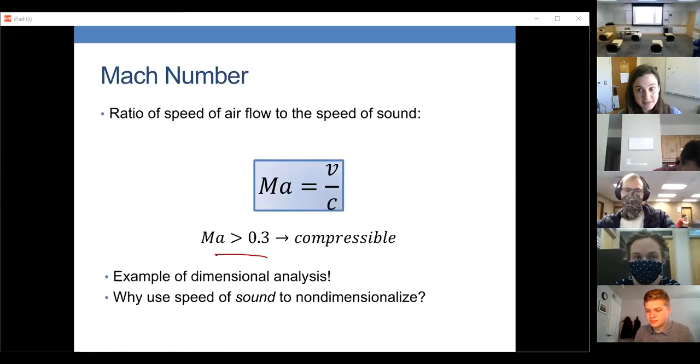What you're getting at is the fact that the speed of sound tells us how sonic waves propagate through the body, and that has to do with compressibility of the fluid. Okay, because the speed of sound is waves of fluctuating pressure and density. That's why you hear it, because that fluctuating pressure bangs on your eardrums.

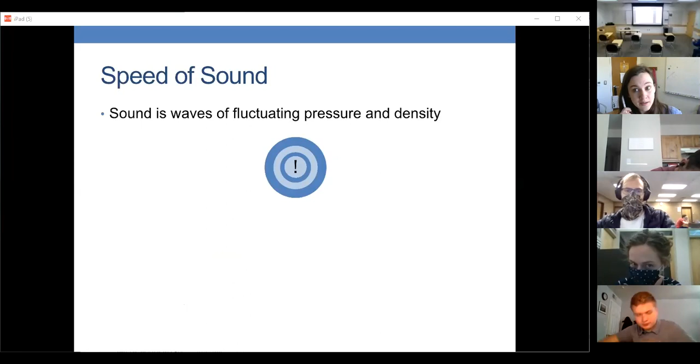And the speed of sound is defined like this. So how much of a change in pressure leads to one change in density and vice versa gives us the speed of sound, which means that the speed of sound is directly related to the compressibility of the gas, how easy the gas is to compress, or the liquid also. And it'll depend on things like the atoms and the interactions, all of that stuff.

Wait, what is the S subscript? Oh, that means constant entropy. Oh. Mm-hmm.

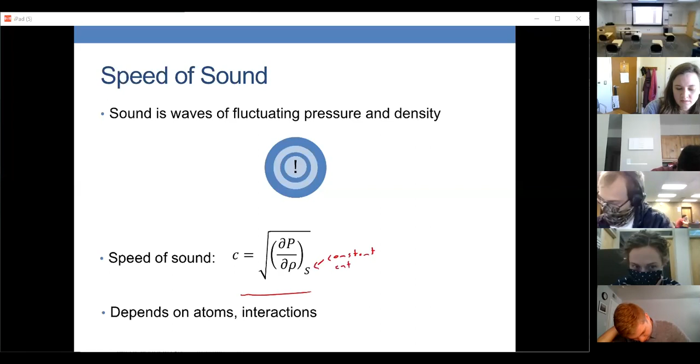But in general, let's say a fluid is easier to compress. That means that for a given change in pressure, you'll get a big change in density. So if a fluid is easier to compress, will it have a faster or a slower speed of sound? Based on that equation right there, I'm going to call on a random person. How about Carter Johnson? Hey, Carter.

Hello. Hi. So based on that equation, will an easier to compress fluid, that means the same delta P leads to a bigger change in the density, have a faster or slower speed of sound? Faster. Okay, look at this again. Wait, sorry, slower. Slower, yep, exactly. Why? Because essentially the density is on the bottom, right? So a smaller density means a bigger C value.

Yep. All right. So this tells us that if a fluid is easier to compress, it will have a slower speed of sound. If it's harder to compress, it will have a higher speed of sound. Basically, if it's harder to compress, the waves will propagate, whereas if it's easier to compress, you'll get some compression rather than those waves banging out against each other.

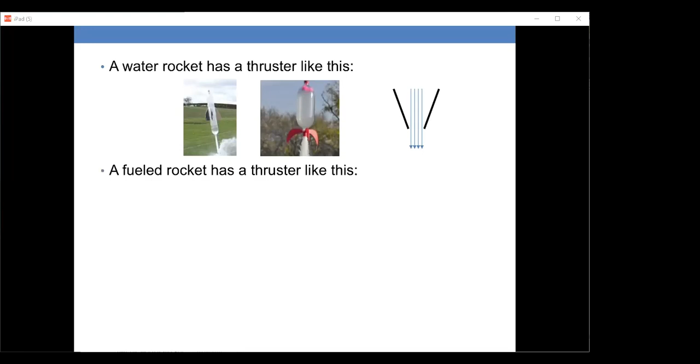You decrease that area, just like when you put your thumb on the hose and it gets faster, it increases the velocity of the water coming out, which, because of the change in momentum, makes the rocket fly up. Okay? But then a fueled rocket has a thruster like that. It gets wider. Why? Because it's not relying on delta P.

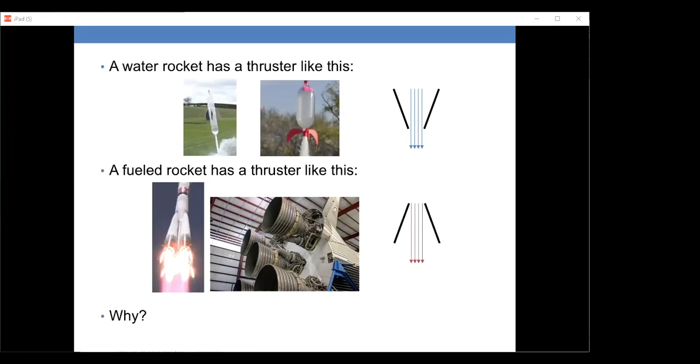We will see. We will see. This is a question I have asked you. I want you to be percolating it in your minds. Okay. So the conservation of mass is just, we know the mass flow rate is constant, which means density times the volumetric flow rate is constant, which means density times the velocity times the area is constant. And this is all for sort of 1D flows. So we're going through like this. Okay.

Right, so we could say, Professor? Yes. Is it because the two fluids coming out of the two rockets, one is compressible and one is not? That is why. Yep. It is because out of the fueled rocket, flow is compressible, and therefore the thruster has to look like that for reasons that we will see shortly.

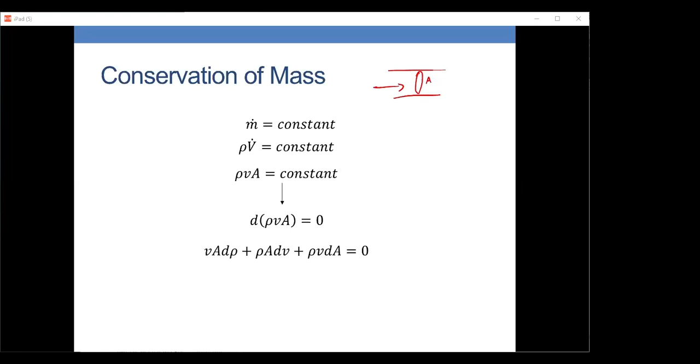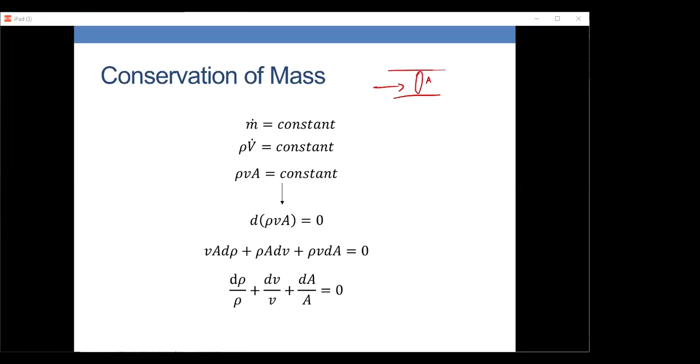So if this were incompressible flow, that d rho over rho just goes away because density isn't changing, and you just end up with dV over V plus dA over A is equal to 0, which turns into V1A1 equals V2A2, just like we've always talked about. And that just says that as the area gets smaller, the velocity has to get bigger. But now, as the area gets smaller, we don't know. The velocity and the density can both change. And so how they will change depends on the thermodynamics of the situation.

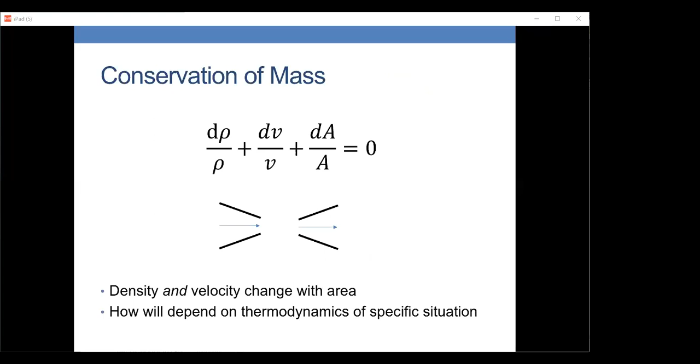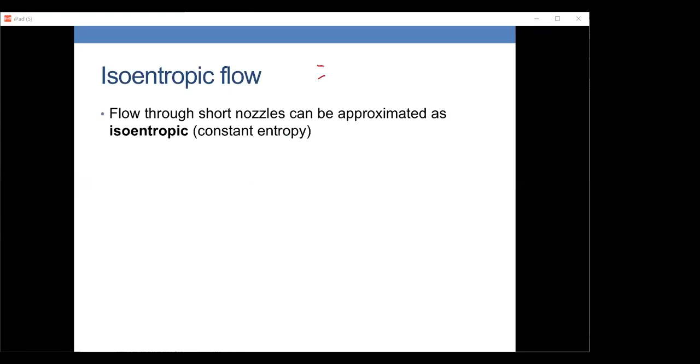And you end up with a bunch of equations. Your book has a chapter on compressible flow; if you are interested in thermodynamics and math, read it. It's got a lot of derivations, a lot of equations in it. We have to make certain assumptions in order to do this. So flow through short nozzles, we are going to approximate as isentropic, which means constant entropy, and that changes various thermodynamic calculations. This means that friction losses have to be insignificant because friction is clearly going to increase entropy.

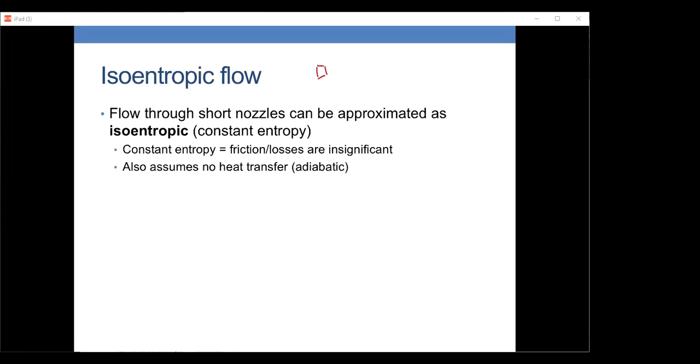Friction creates heat, which gets dissipated out. So we're assuming friction and losses are insignificant. Again, this is sort of short nozzles, things like that. We also assume no heat transfer. So we assume it's adiabatic in this case. And we end up getting that energy balance. And we combine it with some other things. I'm skipping this because y'all have not taken thermodynamics yet. And so we end up with this. This is what I wanted you to see.

And this is just for short nozzles? Yeah, so this is for short nozzles, or when we assume isentropic, which is a better assumption. Like for short nozzles, we can assume this over holes. That's basically what that tank blowdown lab you did. You essentially assumed that flow out of the hole was isentropic, and then you added a discharge coefficient to sort of fuzz over the error of that assumption. Point is, you get this equation. Now, I want us to look at this and to think about what this means.

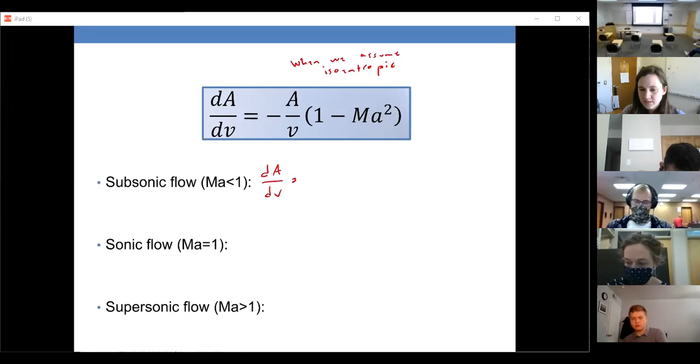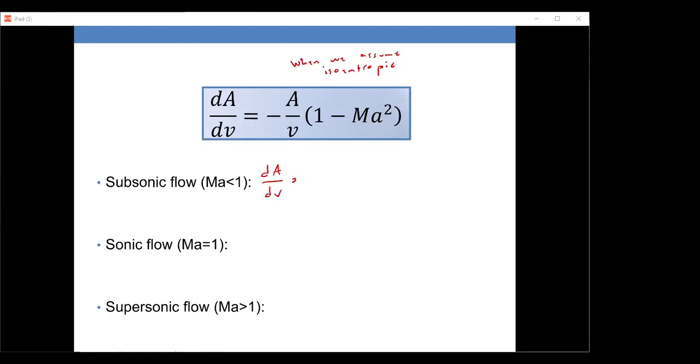So for subsonic flow, so Mach number is less than 1, is the dA/dV positive or negative? Gonna call on a person, actually Christian. Christian, hey. You here? Did you drop away? How about Sion? Hey, Sion. Hello. Hi. So for subsonic flow, which means the Mach number is less than 1, so we're going slower than the speed of sound, is the dA/dV positive or negative?

So it would be negative. Negative. It is negative. And what does that mean physically? If the dA/dV is negative, what does that mean? Would that mean like as a velocity? Okay, how about this? It means that if A goes down, if A gets smaller, what will happen to velocity?

The velocity is increasing? Velocity is increasing. You said it like you were asking a question. You should be more confident because you were right. The fact that the dA/dV is negative means when the area goes down, gets smaller, velocity goes faster, velocity increases. And you were starting to say that too, because you said as velocity increases, area decreases, right? That's what the dA/dV being negative means.

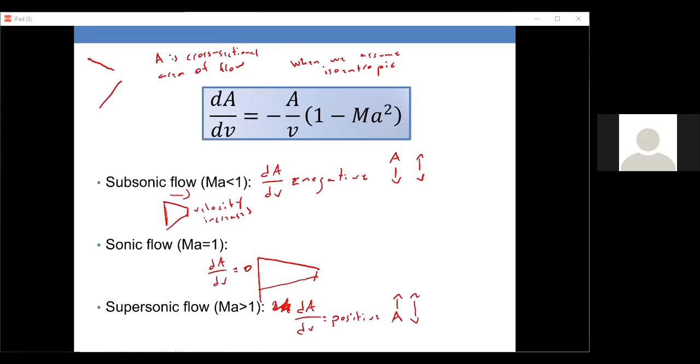And then finally, at supersonic flows, so Mach greater than 1, dA/dV is what? Positive. So that means if you increase the area, it'll actually increase the velocity. So at supersonic flows, increasing the area increases the velocity, the opposite of normal life.

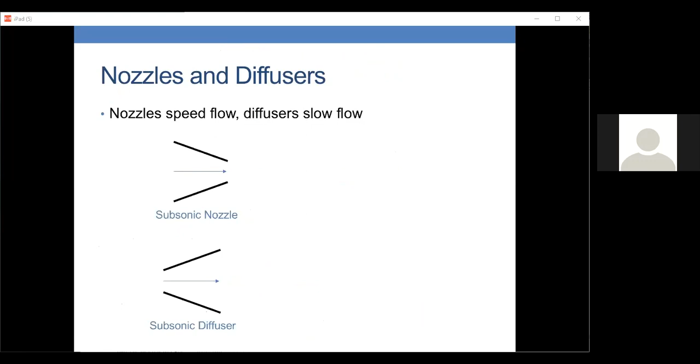So if nozzles speed flow up and diffusers slow flow down, you have a subsonic nozzle and a subsonic diffuser that look like nozzles and diffusers we're familiar with, and you have supersonic nozzles and supersonic diffusers, which are the opposite. And that I would like you to conceptually understand. So to turn back to those rocket engines I showed you, you only saw half of those rocket engines. The whole thing looks like that.

And this is called a converging diverging nozzle. So at subsonic speeds, the nozzle goes in like that. So it speeds the flow up until it reaches sonic speeds, and then it widens out again to keep accelerating it to supersonic speeds. So that is why the rocket engine looks like that, because it is trying to get the hot gases being expelled to supersonic speeds.

Dr. Nickerson? Yes. So the reason for the equation before, the reason that we conventionally call 0.3 the transition, is that simply because 0.3 squared is like 0.09, and below 0.3 it just doesn't change the equation from negative A over V much, or more than that?

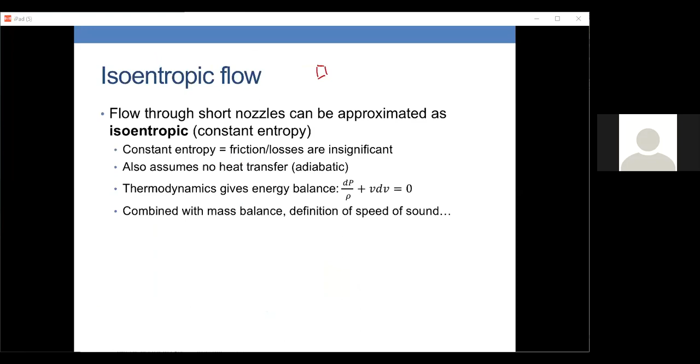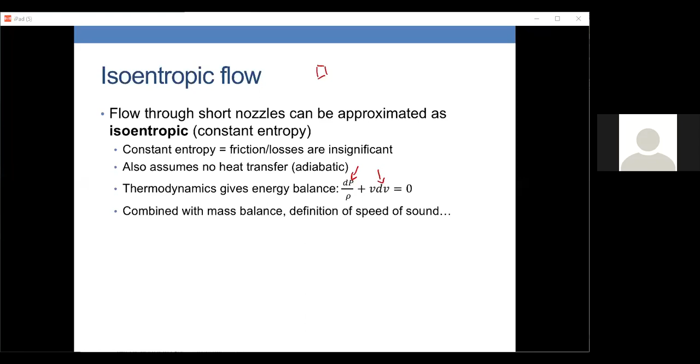So there's a certain amount of energy that can go in between the pressure and the density and the velocity, right? So if the velocity gets faster, then the pressure should go down and the density should go down. And if the velocity gets slower, then the opposite. And so what that means is that it should actually be getting less dense as it's going through there.

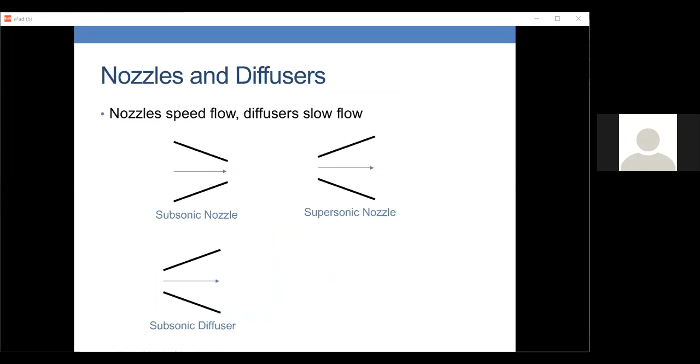Okay. As I said, there's actual equations. It's hard to explain without bringing in like enthalpy and things like that, which is why I feel like the best answer is just to say that once you put in the way that the pressure and the density and the velocity all sort of trade energy between each other, because energy can go into compressing or expanding the gas, and you put it together, this is the relationship you get.

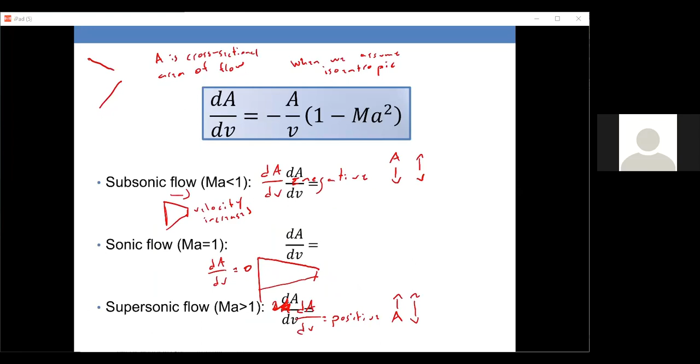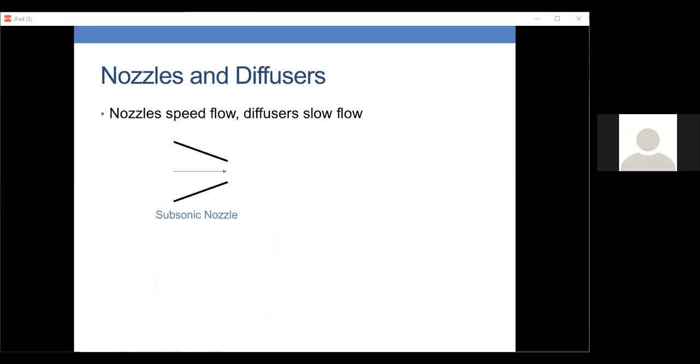Dr. Nickerson? Yeah. Would it be an okay way for now to conceptually think about it like the gas that has been basically over compressed to this point, because now it's going supersonic, when you give it more room to expand, it's almost like a spring that doesn't have room to expand, and then it expands and that gives it more velocity, kind of a thing?

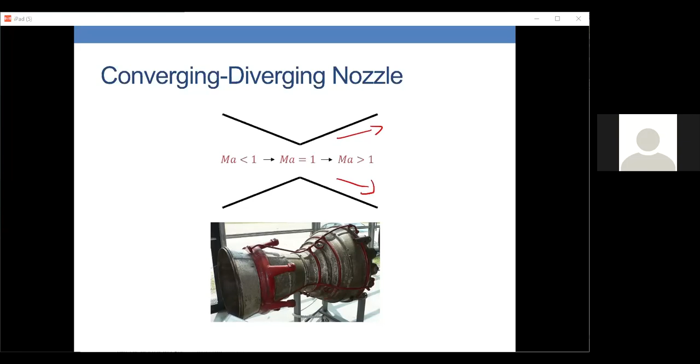Sort of. Because it is true that what is happening here is that the density is expanding, and an expanding gas does work. It provides energy, right? Okay, so the expanding gas, you can almost think of that as, in this part, the expanding gas is pushing it faster. Yeah, okay. That's a way to think about it. As I said, I wanted to find the exact equation of the pressure because all of that is changing through there.

But what I wanted to talk to you about was choked flow. So you learned about choked flow in that lab you did, right? So what is choked flow? Isn't it basically like it reaches a maximum flow through that size of nozzle or orifice? Yes, that is it. Choked flow is when it reaches a maximum velocity. And why does it reach a maximum velocity?

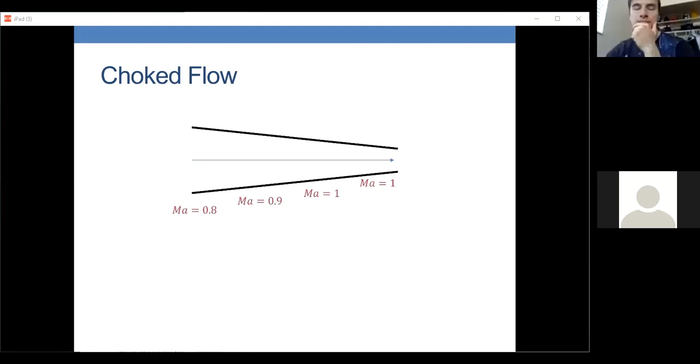Well, if we imagine a nozzle like this, as we said, it keeps getting faster and faster, and now it's at Mach 1. So what will its Mach number be in the next step? 1. It's Mach 1. In order to get it faster than that, we would have to diverge out like that, so the density of the gas would start expanding. That's what we would have to do in order to accelerate beyond that. So that means that we have reached a maximum velocity. That's choked flow.

And the bigger the delta P you have between here and here, the more likely the flow is to choke. Professor? Yeah. So if it was shaped more like the rocket thruster, so it had an expanding area, it would go faster? Yep, it could keep going faster. Cool. Yep, that's how you accelerate stuff from subsonic to supersonic speeds.

But wasn't it supposed to be that dA/dV is 0 when you're at Mach 1? So to me, it seems like you should be able to change the area and still have no effect. Yes, it is, but that's just sort of how derivatives go. That's when the minimum is. That's sort of how derivatives work.

Okay. So, Professor, is the key that it's expanding gradually? Because technically the choked flow nozzle would be coming out into the atmosphere. So it is expanding in the area, but it's just infinite, essentially. Yeah, that is probably the key, that it expands gradually. Because you're right. If it was just like this, it is expanding out here, but it doesn't do anything. So it probably is the key that it's expanding gradually.

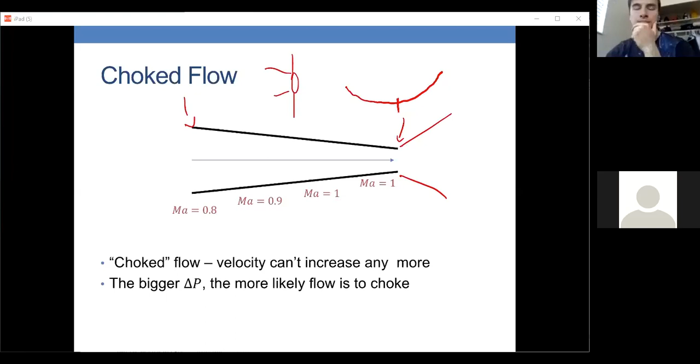Probably aerospace engineers know exactly what the angle has to be to sort of coax it along. I do not know that; you'd probably have to be a rocket scientist. Yep. Is this what things like your lawnmower are referring to when you put on the choke to start the engine? I doubt it.

I doubt it gets compressible. I don't think so. The choke basically just changes the gasoline to air mixture. Yeah.

And so a gasoline engine has some superheated gas in it, right? You burn the gas and it creates this hot air full of combustion products that you then squeeze, and then it creates all of this hot gas which pushes back, right? And that turns whatever the thing is, and then the engine goes. So probably gas gets a little bit compressible inside a gasoline engine, I would bet.

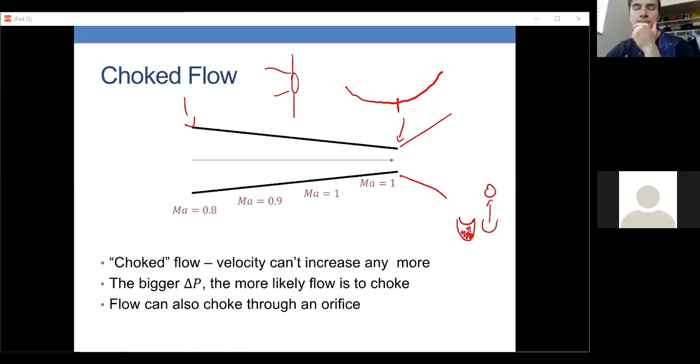I don't think that you could get choke flow in there, but I don't think that's what that's referring to. Okay. So, flow can also choke through an orifice, like with this tank. So this is like that tank problem you did.

And there's a general rule of thumb for deciding whether a flow out of this tank orifice is compressible. Well, the actual rule of thumb is if the pressure is about twice atmospheric pressure, it will come out choked. And you can check it with that. And then this is the mass flow rate, assuming that there's no entropy and nothing is lost to friction. And this equation you actually used in that lab, I believe.

So if you have some tank at some pressure, and it's high enough pressure that flow out of it is going to be choked, this will be the initial mass flow rate. And then what will happen over time? It'll decrease. It'll decrease because the pressure in the tank is going to decrease, right? You're letting stuff out of the tank. The pressure in the tank will decrease. The temperature in the tank will also change.

Just out of curiosity, does anyone remember how the pressure and the temperature in the tank changes? That lab tells you in the description, but I don't know whether you've taken thermo yet. I think for that lab, we ended up assuming that it was an isothermal process. Yeah. And so the temperature didn't change much. You did one assuming it was isothermal, so you could do the math, and then you did another one assuming it was adiabatic. So if it's adiabatic, what happens to the temperature?

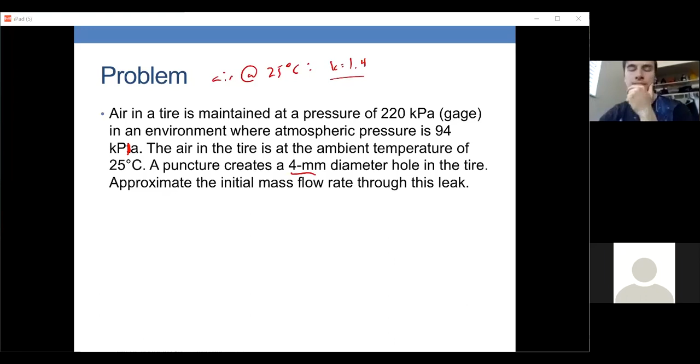Did someone calculate this? I got 178. 178. Okay, so that means that the absolute pressure inside the tire is well over that. We can assume it's going to be choked going out. So now just plug it on in.

Okay, molecular weight of air, I usually use 28 grams per mole. That's what I usually use, but we can Google it. Molecular weight of air: 29 grams per mole.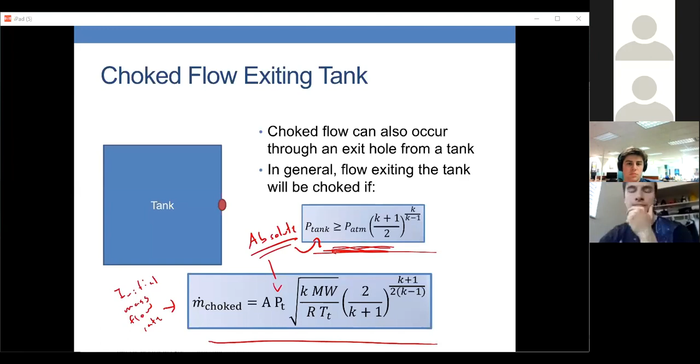Dr. Nickerson, I'm still confused how we know this is choked flow. Well, that is why we did this first. There are some more complicated equations behind it, but this rule just tells us that the pressure difference is so big that flow will be choked. Oh, so we checked to see if the tank was greater than the right-hand side of that equation. Okay. And all that's happening there is a really big pressure difference accelerates the flow really fast until it gets to sonic speeds. And eventually, when the pressure in the tank is low enough, it's going to keep going slower until it drops to subsonic speed and it's not choked anymore. Choked speed is at its maximum speed.

Yes? I got a quick question. I just looked at the answer that I got, and I'm seeing either like 9,241 or 9.241. And that all depends on whether I use kilopascals or pascals. Well, yes, because look, the pressure is right here, right? So if you use kilopascals instead of pascals, that's different. That'll give me kilograms as an answer then? No, because

pascals go with kilograms. 1 pascal is equal to 1 kilogram times meter per second squared, mass times acceleration, which is force, over meter squared. So if you put in pascals there, you should get kilograms out. If you put in kilopascals there, you should get 1,000 times that, which is like a megagram or something. Okay. In that case, I'm still getting 9 kilograms, and most people are getting 9 grams. Do you know what could be causing that?

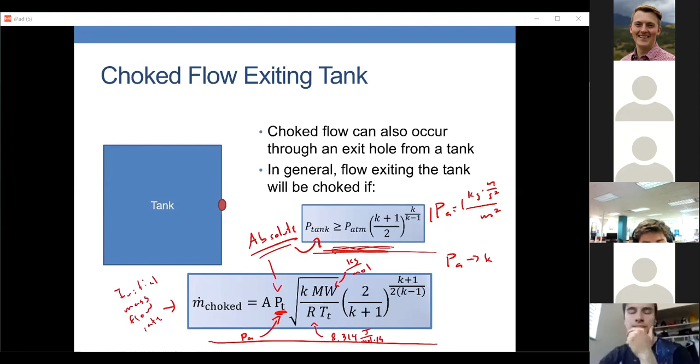Probably. So again, in order to make all of these units match, you want to turn molecular weight into kilograms per mole. And then K is unitless. You want this to be pascals, not kilopascals. And you want this to be 8.314 joules per mole Kelvin, not kilojoules. So if you keep all of those right, it should come out as kilograms. So everyone should check and make sure they did all of those in the correct units. All right, there we go.

Okay, so compressible flow is actually really interesting. And I had to make some choices about how much I was gonna talk about, which maybe was a mistake, because then some of you were like, why is this happening? Because I skipped a bunch of the steps. There are a lot of different situations in compressible flow. We only talked about isentropic flow. And on Wednesday, we're going to talk about what happens when you have a pipe with friction, which means that there's entropy, which means other stuff, right? I will post the recording on this.

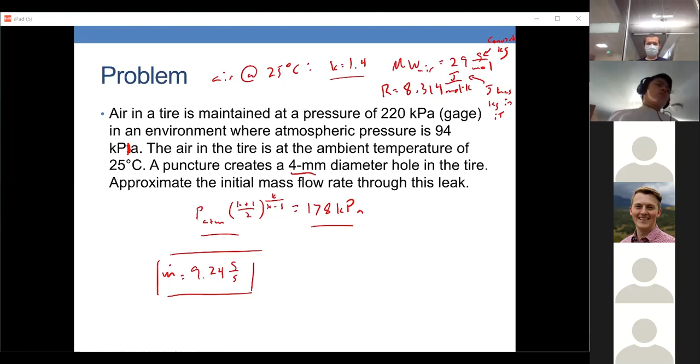Conceptually, I want you to remember that flow gets choked when it gets to sonic speeds. I want you to remember that the speed of sound is related to how compressible something is. I want you to remember how the supersonic nozzles work. That's what I want you to remember.